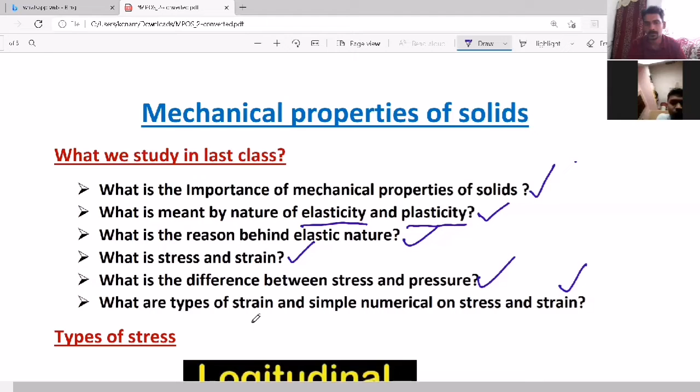After that, we took the introduction of the types of strain and simple numericals on stress and strain, like force by area, and based on the strain, what is the change in configuration. So these are the simple things we have studied, and 2-3 simple numericals we have solved. Now today, the very first thing we are going to study is types of stress. So till now, I have just given the brief idea, a reminder of what we have studied in the last class.

So now, today's first thing, as I said, types of stress. What is the first thing? Types of stress.

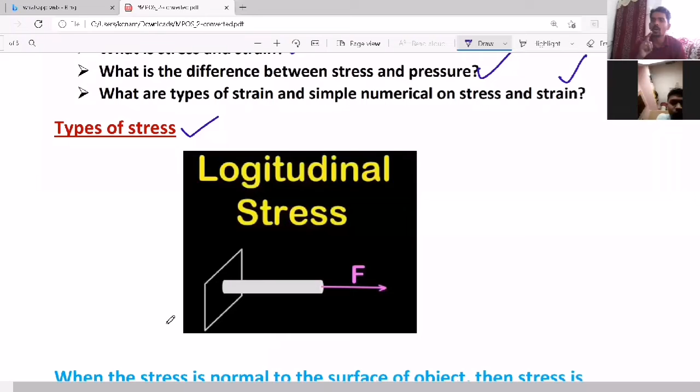So the types of stress, the very first thing is longitudinal stress. There are majorly 3 types of stress in our syllabus, and the first one is longitudinal stress. Here in the diagram you can see there is a rod, and you are applying force in this direction. The force is perpendicular to the area. This is the circular area of the rod, and you are applying force perpendicular to its surface.

So when there is a surface area, look at my hand, the direction is like this, perpendicular force direction. Then the stress developed, we call it longitudinal stress. But every stress is what? Stress is nothing but force by area only. Same formula for all types of stress. Even though we say 3 types of stress, in each case the stress is force by area only. But here longitudinal stress means the force which is acting perpendicular to the surface.

Just take one simple example: here there is a fixed support and one rod, or one thick rope, is attached. Now you apply force here. You try to hang from that, I mean you try to pull that. Then the force will act perpendicular to the circular area of the rope or rod. So that is F.

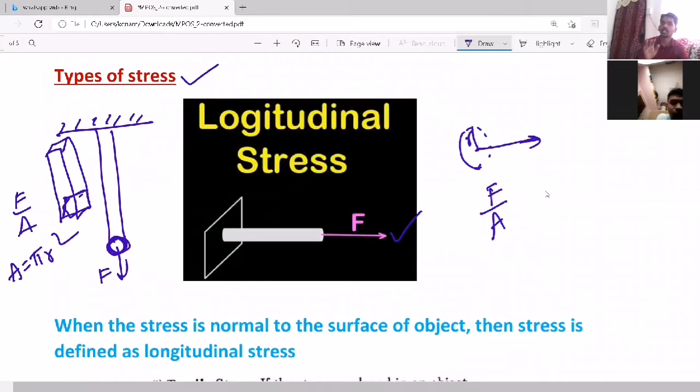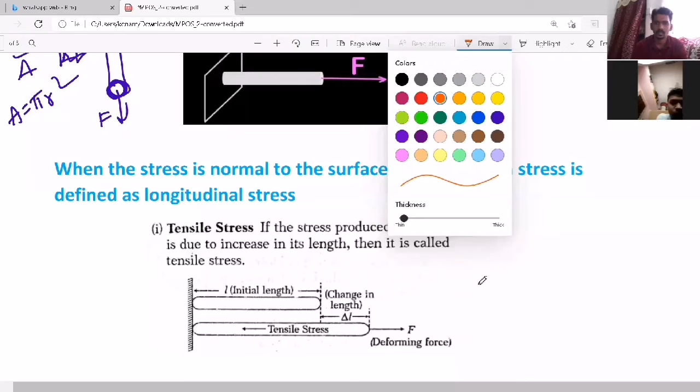But here again 2 cases come. I have written the definition also. So what is the definition? The definition is: when the stress is normal to the surface of the object, that means longitudinal stress.

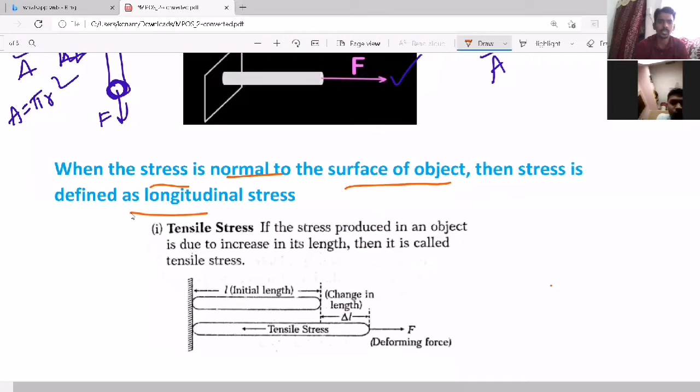But here 2 cases will come, I am telling: the first one is tensile stress, and the other one is compressive stress. What is the difference? Both are longitudinal stress only. But the difference is, let's take a wire hanging from a fixed support and you are pulling it with a force F. Then according to Newton's third law, you are pulling it with force F downward, so an equal and opposite force will develop in the opposite direction.

So for the wire, one force will pull it up, one force will pull it down. Then the wire will stretch, look at my hands, the wire is stretching. Then the length increases, it tries to increase. The stress developed is perpendicular to the surface area, and it is trying to increase the length of the object, and that's why it is called tensile stress. If the stress produced in the object is due to increase in its length, then it is called tensile stress. You applied some force, so there is a change in the length delta L. You are applying deforming force, so from initial length to final length there is an increase, and the corresponding stress is called tensile stress.

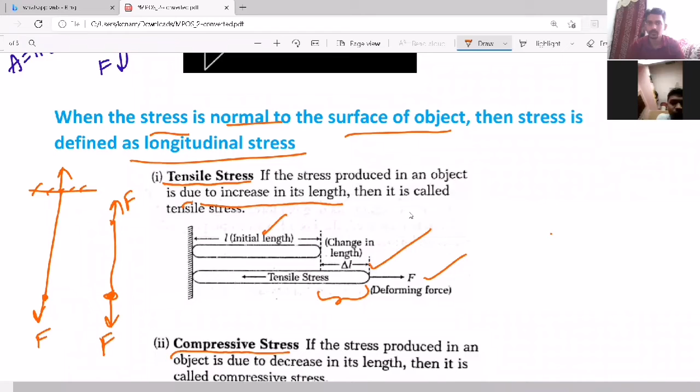That is the first sub part of longitudinal stress. Similarly, for compressive stress, look at my hand again: suppose this is the rod. Now you keep it on the surface, and from the top surface you try to press it. You don't try to pull it, you try to push it downwards, so you are trying to press the body. Then the length decreases, so the length is decreasing. That's why it is called compressive. You are trying to compress the body, that's why it is called compressive stress.

But here also you are trying to apply the force perpendicular to the surface. Surface is like this, and you are trying to apply force in this manner. Please try to observe my hands, so that the stress we define it as is again...

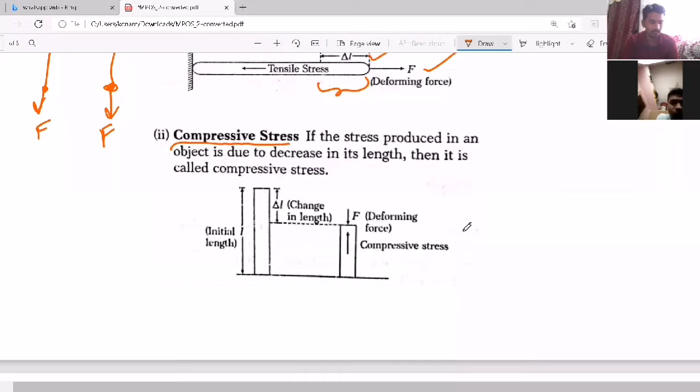...longitudinal stress only. But as there are two types of longitudinal stress, we call one of them compressive stress. So that is the difference between tensile stress and compressive stress. Now, after that, there is a longitudinal stress which may be tensile stress or compressive stress, but one common thing is...

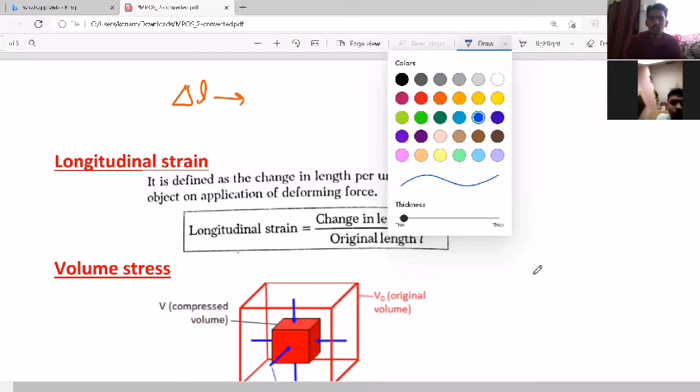what is changing here? Length. Length may increase, length may decrease. So there is a change in length always, delta L. Delta L may be plus or minus, but there is a change in length.

And there is an initial length also. So here what configuration has got changed? Length. Length of the object got changed. Because what we said, you apply deforming force, it develops stress, which causes strain. Nothing but what? The change in the configuration of the object. One of the dimensions will change. What dimension has changed in this case?

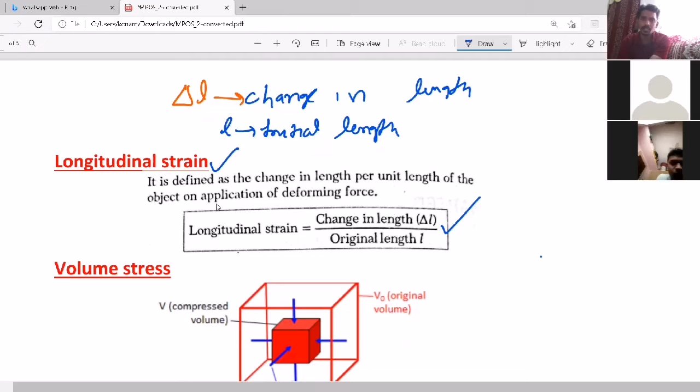Length. So that's why here the corresponding strain is called longitudinal strain. See here, longitudinal strain is the ratio of change in length by original length. That is the longitudinal strain. So there is a longitudinal stress, means there must be one corresponding longitudinal strain also.

Now the next thing. So after longitudinal stress, the next stress in our syllabus is volume stress. What is this? Volume stress. Now the name itself is saying you can also define it as hydraulic stress, also bulk stress in our syllabus. What we can call it as bulk stress or hydraulic stress. Also we can define it. Why we define it, we'll see first.

So here, if you look at the cubical shape, when you try to apply force from all directions equally, perpendicular to the surface, then what is happening? The volume is decreasing. But here the problem is, suppose you take a ball, you all know a smiley ball. So take the smiley ball and press it. Then shape changes. That is volume stress only. You are applying some force per unit area.

So that is called volume stress. Very good. But the change in shape is irregular. Once you press it randomly, the shape of the smiley ball is no more spherical. But we need the change to be such that the shape should not change, only configuration changes, dimension changes. Then only we can calculate. That's why we take a specific case. What is that specific case? You take a solid ball, spherical ball.

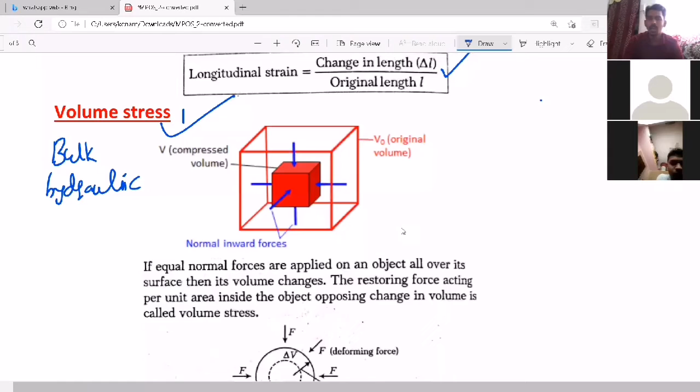You take a solid spherical ball and keep it inside the liquid, as shown in the diagram. You kept it inside the liquid, where liquid will apply pressure. So the pressure is nothing but force by area. So that only here we call it as stress, and that will act at every point on the surface perpendicular, as shown. So from all directions equal force, so there is equal change in volume.

So that's why in the diagram it is representing, see here, the inner dotted one is there, right? So that is the final volume, and the outer one is the initial volume. So there is a decrease in volume always. So in our syllabus, volume stress means it always causes a decrease in volume, not an increase in volume.

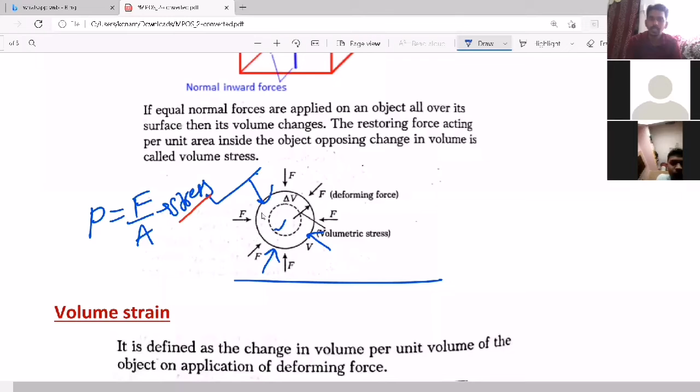Why am I specifying this? Because in the last topic, longitudinal stress means length may increase or length may decrease. But here also volume may increase, volume may decrease. But in our case, what is possible in practicality? Volume always decreases. So that's why here the corresponding strain is volume strain, that is delta V by V, or exactly written as minus delta V by V. That is the change in volume by initial volume, which is what we call volume strain.

So this way, the second one is all about: you apply some deforming force, that develops stress which causes a change in the volume, and that we call volume stress or bulk stress or hydraulic stress. Why do we call it hydraulic stress? Because it is related to liquids or fluids.

That's why we call it hydraulic. Hydraulic is the word related to fluids. That's why we also name it hydraulic stress. But the corresponding strain, you can simply take it as volume strain.

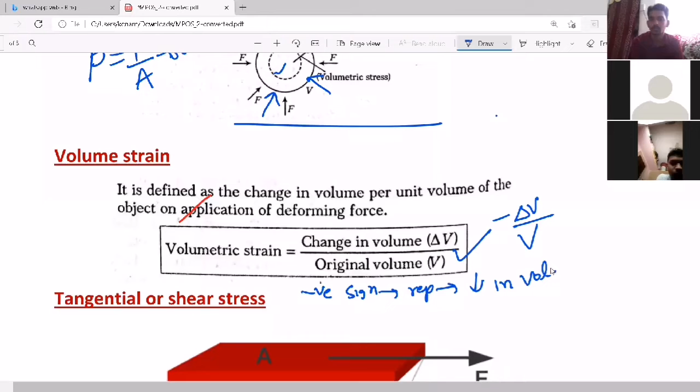Why are we taking minus here? The minus sign represents decrease in volume. That's important, just make a note of it. What does the negative sign represent? It represents decrease in volume. That's it. So now the third one.

Tangential or shear stress. What is that? So the first one, longitudinal stress, causes change in length. The second one, volume stress, causes change in volume. And this one, tangential or shear stress.

Shear or tangential stress means you have to apply force parallel to the surface, along the surface. Please look at my hands. The force should act parallel to the surface. So what happens is the bottom of the surface is fixed and you are applying force on the top surface, trying to push it.

Then there is a slight displacement. Now let us take it like this. This is the bottom, fixed. Now I am applying force parallel to it, so it is slightly displacing. It is not changing its shape, it is just slightly displacing. In that case, we call it tangential or shear stress.

See here, in the diagram it is clearly showing the top surface. This is the top surface, and on the top surface we are applying a force which is parallel to the surface. So again, force by area is called stress, but since it is acting parallel to the surface, we call it tangential stress.

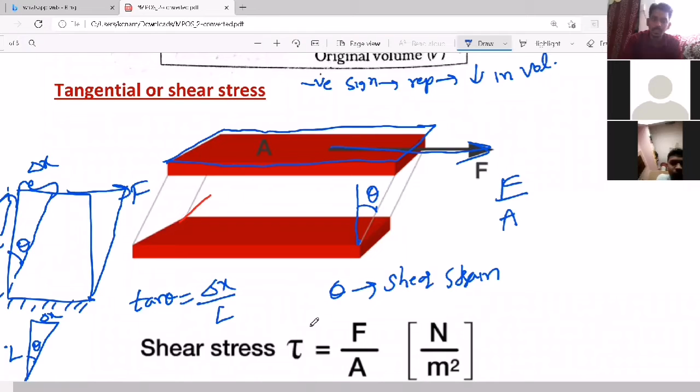That's why I said mathematics is very important for physics. One more mathematics point is important here: theta value is very small. When the object is fixed at the bottom and you apply tangential force, it slightly displaces by a very, very small angle. As the angle is very small, according to trigonometry, tan theta is approximately equal to theta, and that theta or tan theta equals delta x by L, we call it shear strain.

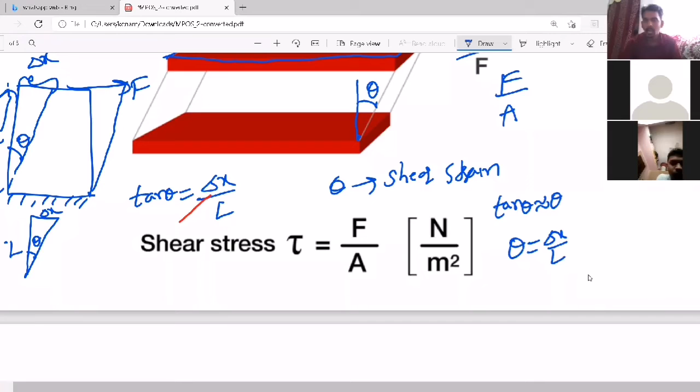So there are three kinds of stress we can develop on a particular body in three different situations, and there are three kinds of corresponding strain. So that is what I am showing again here with the diagram.

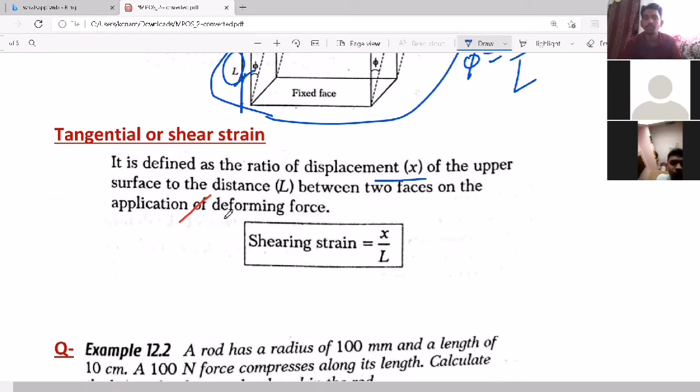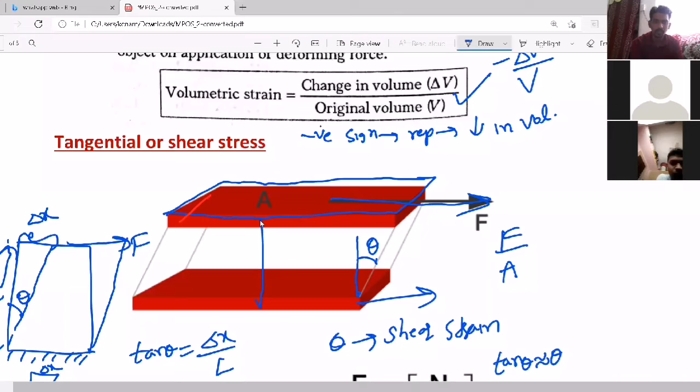Now the definition: it is defined as the ratio of displacement of the upper surface to the distance L between the two faces, on application of a deforming force. What does that mean? See here clearly, this is one surface, this is the other surface, and this is the distance between them, which is what we are representing as L. So it is x by L, or delta x by L.

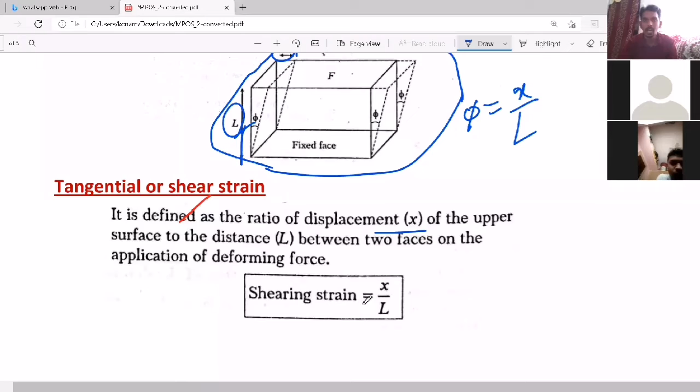So these are the three types of stress we can produce, and these are the three situations where we can calculate stress and the corresponding strain, which is exactly what is in our syllabus. Now let's take one or two simple questions based on it.

First question: a rod has radius 100 millimeter and length 10 centimeter, and a 100 Newton force compresses it along its length. Calculate the longitudinal stress developed in the rod. First understand the question and write the data.

What stress are they specifying here? Longitudinal stress. But the formula is force by area only. Here radius is given, so what will the area become? Pi r square, where F value is given as force 100 Newton, and pi is approximately 22 by 7 or 3.14, with radius mentioned as 100 millimeter.

100 millimeter is nothing but 100 into 10 power minus 3 meter. 100 can be written as 10 power 2, multiplied by 10 power minus 3. Using the formula x power m into x power n equals x power m plus n, 2 minus 3 gives 10 power minus 1. This way you can find the radius value in terms of meter.

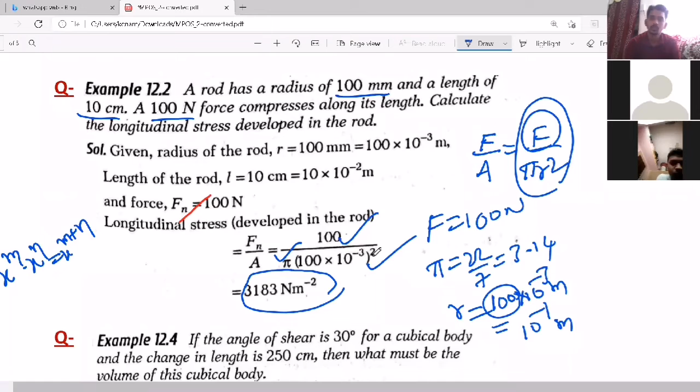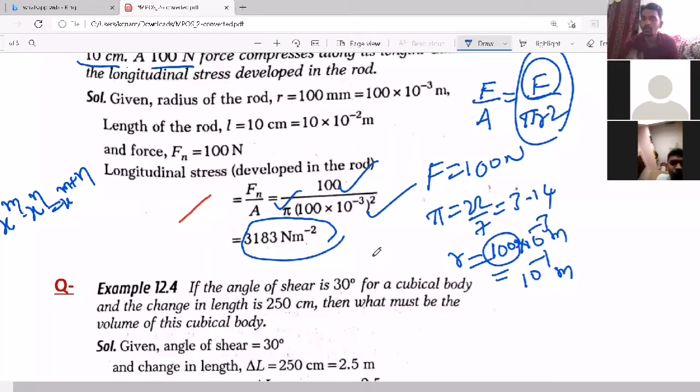While doing calculation, you must be precise, take some approximations, and calculate very quickly. Only then can you save time from the entrance exam point of view. So please try to understand the question, collect the data, convert units, substitute in the formula, and do the proper calculation. 60% of questions in NEET or any entrance exam are based on these formulas and data, where you need to understand the question, immediately realize what topic or chapter it is, take the corresponding formula, then take the data, do the required conversion, substitute, and calculate properly.

Now one more question: if the angle of shear is 30 degrees for a cubical body and the change in length is 250 centimeter, then what must be the volume of this cubical body? Given: angle of shear is 30 degrees.

But one more thing I didn't specify earlier: when you take shear stress or shear strain, we take tan theta approximately as theta, because theta is very small in practicality. But in this question, they have given angle as 30 degrees, so you don't take it as theta, because theta is not small here. When theta is 1 degree, 2 degree, very small value, then tan theta is approximately theta. But when theta is not small, then you take tan theta as it is. The formula remains the same.

Tan theta equals delta x by L. If the angle of shear is given and the change in length is 250 centimeter, then what must be the volume? Consider the body like this: take the side length as L, and it got shifted by distance delta x, which is given as 250 centimeter.

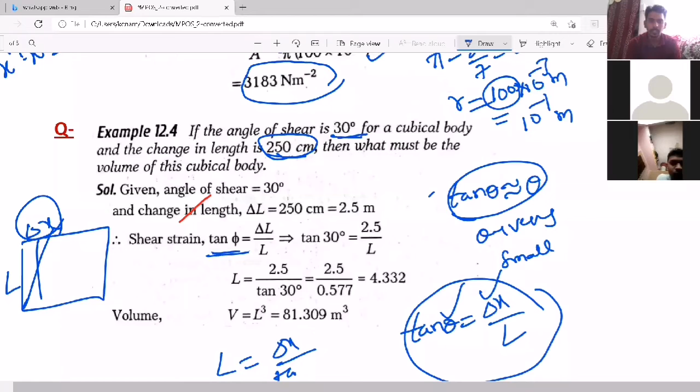Then tan theta equals delta x by L: theta is given, delta x is given, so you can find L. Take L to the left side: L equals delta x by tan theta. Using trigonometric ratios, tan 30 is 1 by root 3. Substitute and you will get the L value. And you know that the volume of a cube is L cube, so once you find L, take volume equal to L cube.

Just try to substitute. While doing the calculation, this is like a descriptive question, but in the NEET entrance it will come with options. Here L value is 4.3. Now 4 cube means 64, 5 cube means 125. If the values are very close, then you don't take approximation; if the options are far apart, with a huge difference, then you can take approximation. Then try to calculate, and it will become easy and quick for you.

Calculation plays a vital role from the entrance exam point of view. So till now we studied the three types of stress, their formulas, and the corresponding strain - longitudinal stress and strain, volume stress and strain, and shear stress and shear strain. So the final conclusion is: you apply deforming force, there is a stress, and there is a corresponding strain. Force develops stress, and stress causes strain.

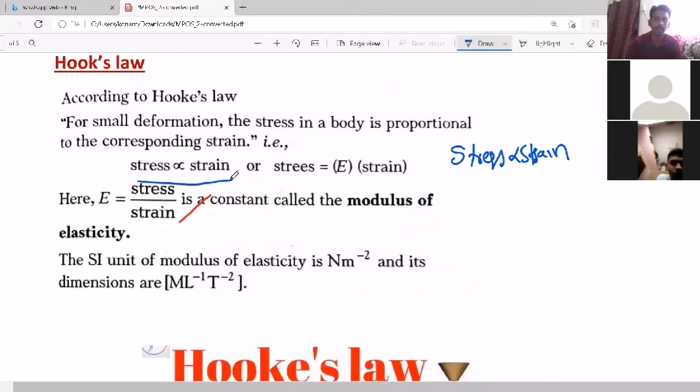Under such elastic limit, what he said is stress is directly proportional to strain. What is the relation he said? Stress is directly proportional to strain. So that is what we represented here.

But wherever proportionality is there, to remove the proportionality we substitute one constant. So here also the proportionality constant will come, which we represent with capital E, called modulus of elasticity. Modulus of elasticity means a factor on which the stress and strain depends, or which depends on the nature of the substance.

So E is called elasticity, elastic coefficient, or modulus of elasticity. If you take the formula and bring strain to this side, it becomes E equal to stress by strain, where stress means force by area, so Newton per meter square. But strain is dimensionless. That's why the dimension or unit of E is the same as stress - the units of E are same as stress, because strain has no dimensions or units.

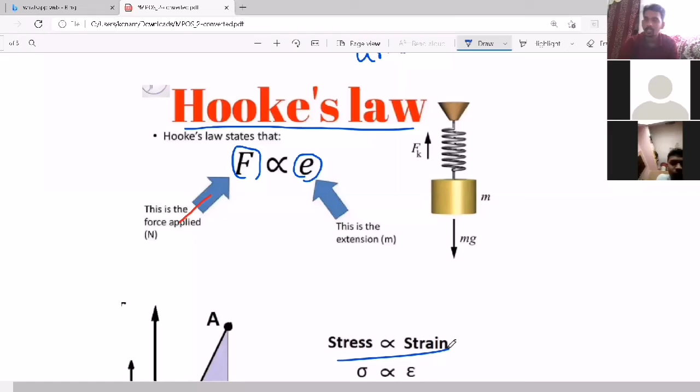So here, Hooke's law says when you apply force, there is an extension in the spring just like this, so force is proportional to extension. Same way here, stress is proportional to strain - that is Hooke's law. So force or stress is always directly proportional to the strain, or change in configuration. That is Hooke's law.

So here, if you take a graph between stress and strain, with stress on the y-axis and strain on the x-axis, that means it's in y proportional to x form. If y is proportional to x, that becomes y equal to mx form, where m is the slope of the graph. If the graph makes some angle theta with the x-axis, then tan theta is called the slope of the graph. So for any graph, slope of the graph - how to find it.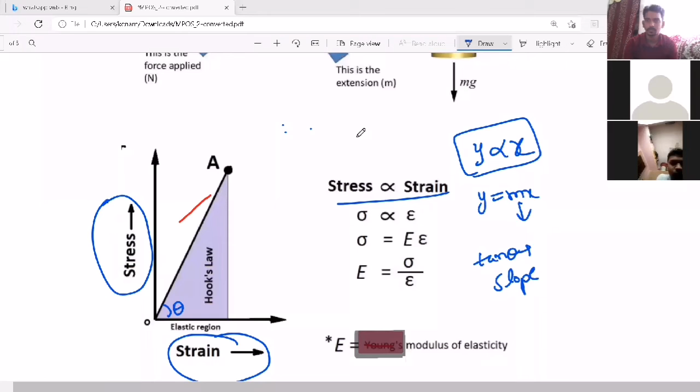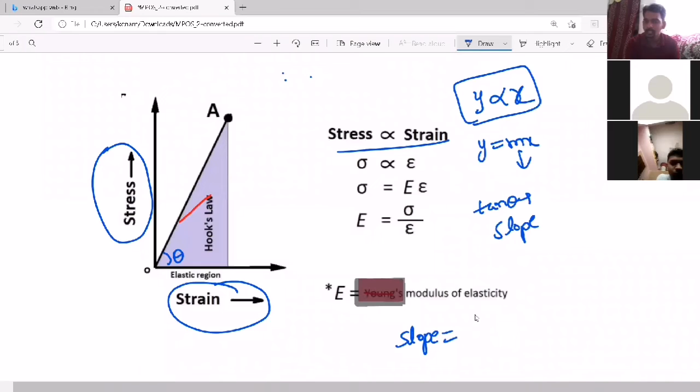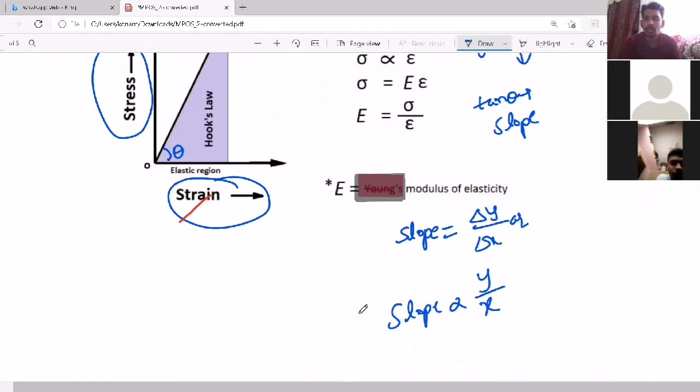For any graph, slope means tan theta, where theta is the angle made by the graph with the x-axis. Another important formula: slope means delta y by delta x, or slope of a graph is directly proportional to y quantity by x quantity in physics. So slope of any graph, in physics or anywhere, is equal to y quantity by x quantity.

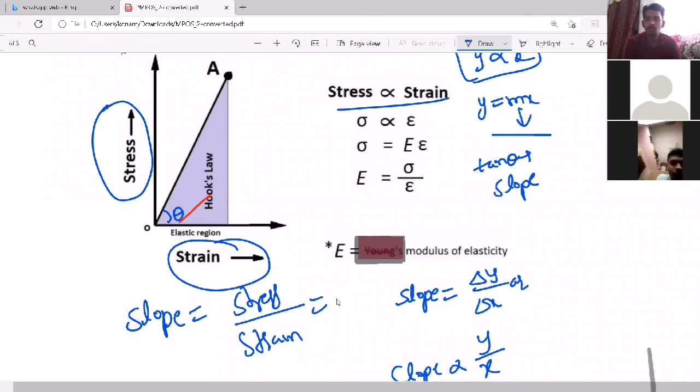So when there is a graph between stress and strain, it is a straight line passing through origin because it is in the y equal to mx form. The slope of the stress-strain graph is proportional to stress by strain, which is nothing but modulus of elasticity. If they ask what is the graph between stress and strain, it is a straight line passing through origin. If they give a stress versus strain graph, the slope becomes y quantity by x quantity, or tan theta, where theta is the angle made by the graph with the x-axis.

So the conclusion is: slope of stress versus strain graph is equal to modulus of elasticity, and that always remains constant because it is a straight line. A straight line graph means slope is constant everywhere, same slope at every point. See here, in the figure, at this point the angle is theta, and at this point also the angle is theta. So at every point, the slope remains the same for a straight line.

So the final conclusion is slope of stress versus strain graph is proportional to stress by strain, that is proportional to modulus of elasticity. So more slope means more elasticity.

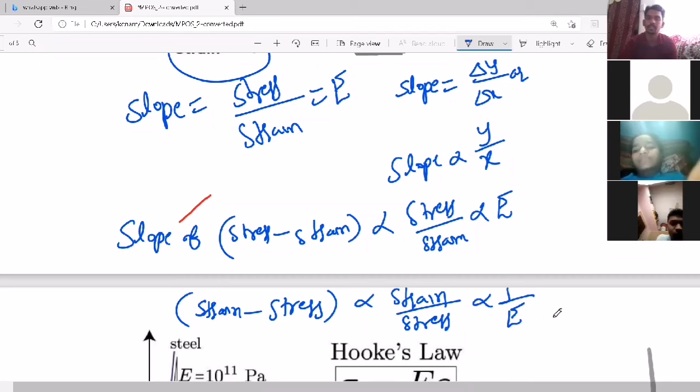Sometimes they may give the graph between strain versus stress just to confuse. Suppose they have given strain on y-axis and stress on x-axis, then it will become strain by stress, that means it will become proportional to 1 by E. That difference also you should be able to find.

Now let's see, there are four different materials: steel, plastic, rubber, and some biological tissues. If you compare whose slope is more, the steel slope is more compared to plastic, compared to rubber. That means slope is more means more stress it can bear, that's why it is more elastic body.

When you compare two substances, whoever has more slope is more elastic, that means it can bear more stress and cannot break that easily. That is what you can understand from the graph.

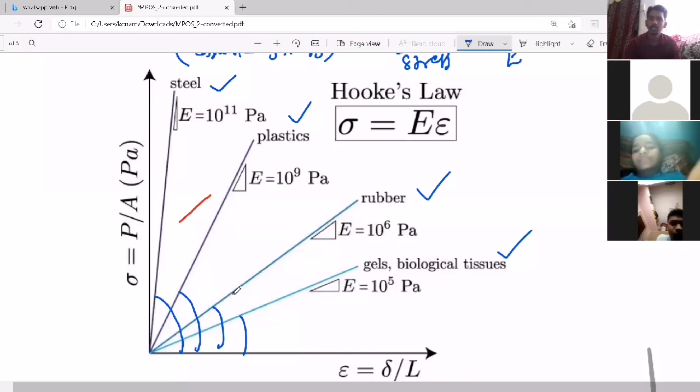So here also the graph is between stress versus strain. You can represent stress with the symbol sigma and strain with the symbol epsilon. This is epsilon, this is sigma, the symbols for stress and strain.

So here I have given a general comparison between a few materials. You might be thinking rubber is more elastic since it easily stretches, but that doesn't mean it is more elastic. It cannot bear maximum force; if you apply just a little force, it will break. But steel, you can stretch it longer, that's why it is called able to bear more stress for a small change in strain, and that's why it is called more elastic.

Modulus of elasticity depends on the type of material. Steel is one type of material, iron is another, brass is another, rubber is another. It does not depend upon the value of stress and strain. As stress increases, strain increases, but the ratio of stress by strain, that is modulus of elasticity of a material, remains constant. That is what the Hooke's law says.

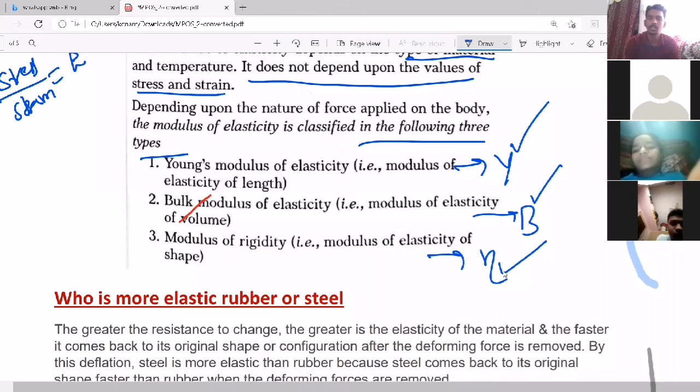As we have seen, there are three types of stress and three types of strain. First, longitudinal stress by longitudinal strain gives Young's modulus. Volume stress by volume strain gives bulk modulus. And shear stress by shear strain is called rigidity modulus. These three things we will study in detail in the coming class.

Now, who is more elastic, rubber or steel? See here, the greater the resistance to change, the greater is the elasticity of the material, and the faster it comes back to its original shape or configuration after the deforming force is removed.

See, take a rubber eraser, whatever you use daily, and try to bend it. It will bend easily, but it will come back slowly. So such kind of material is called less elastic. Easy stretchable doesn't mean it is more elastic.

But when you consider steel, it is very hard to stretch, and it will come back to its original position quickly. That's why it is more elastic. It has greater resistance to change. It should oppose the change, and greater elasticity, then it is called so.

So who is more elastic? Steel is more elastic than rubber, because steel comes back to its original shape faster than rubber when the deforming forces are removed. Steel can resist greater force and it can come back quickly. That's why it is called more elastic, under the elastic limit. We are talking only about under the elastic limit.

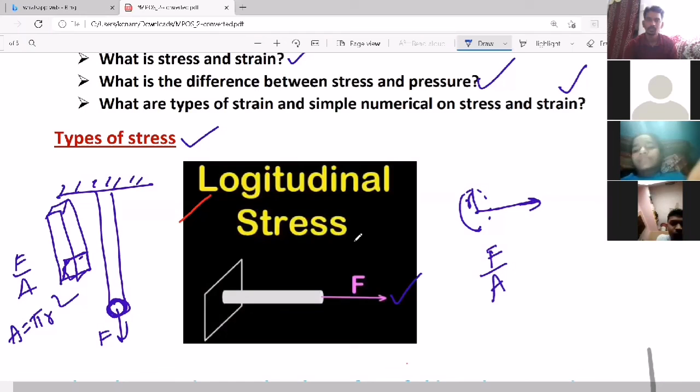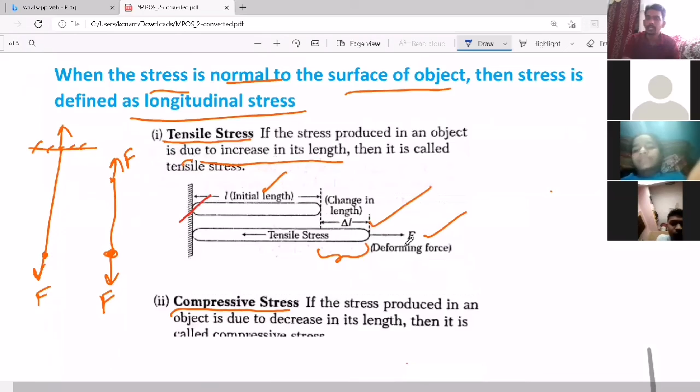Now let's have a look at what we have studied till now. First, types of stress: longitudinal stress, where force acts perpendicular to the surface area, which is again two types - tensile stress when length increases, compressive stress when length decreases, and the corresponding strain is longitudinal strain, that is delta L by L.

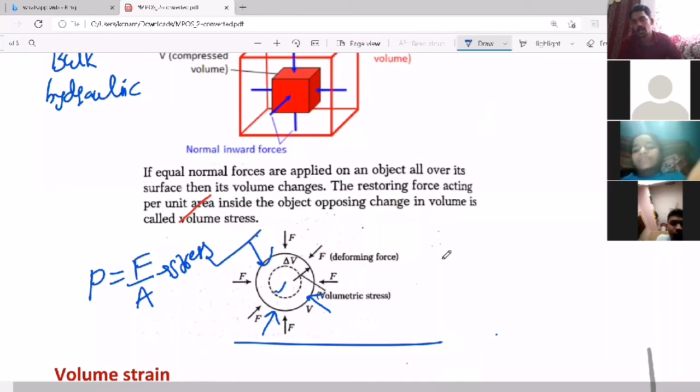The second one is volume stress, where volume changes, but in our syllabus volume decreases. So that is also called hydraulic stress or bulk stress, and the corresponding strain is bulk strain or volume strain. Here the negative sign represents there is a decrease in volume of the body.

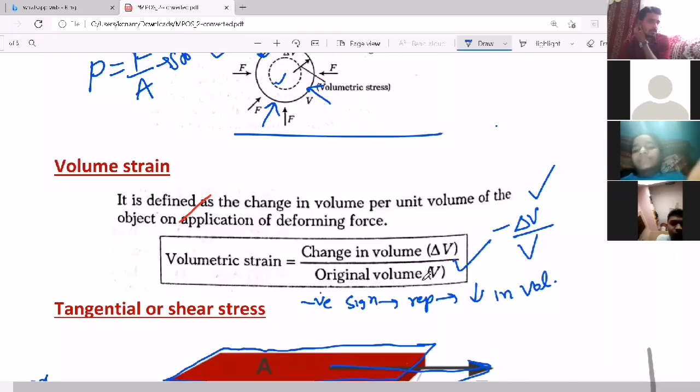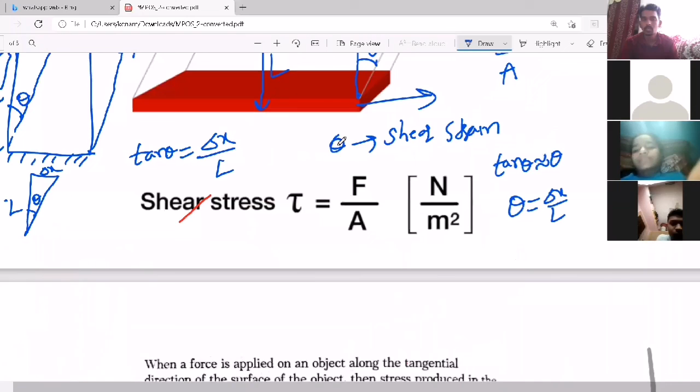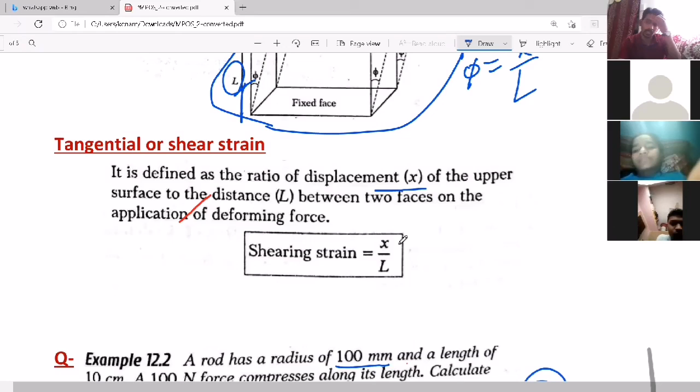Third, tangential or shear stress, where force is applied parallel to the surface so that there is a shift in the position, and that shift, that angle, is called shear strain. In this case we consider the angle to be very small, so tan theta is approximately equal to theta. We have seen two simple questions based on stress and strain.

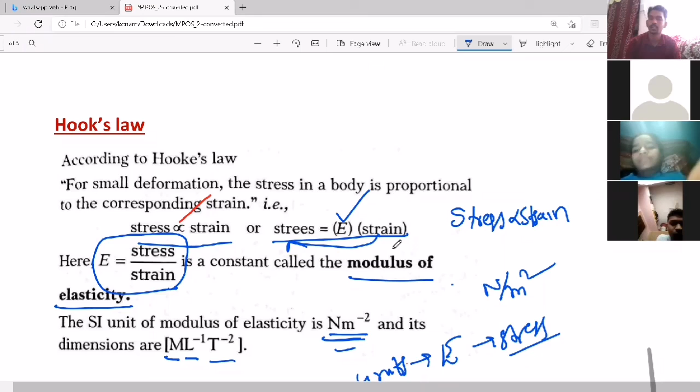The next thing we studied is Hooke's law, which says that stress is directly proportional to strain. When you increase the deforming force, stress increases and strain also changes, but the ratio stress by strain remains constant, and that ratio is called modulus of elasticity, whose unit is same as stress, Newton per meter square.

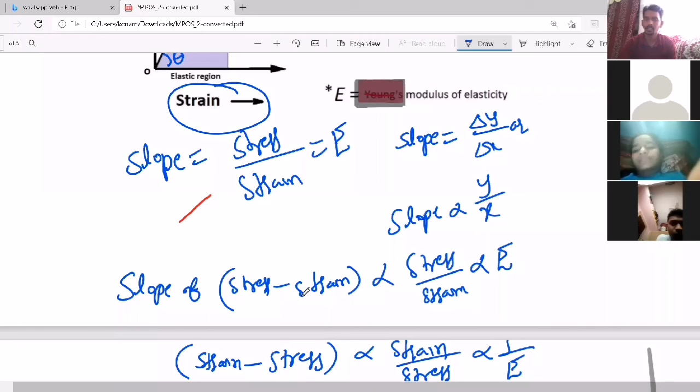That is stress by strain. If you draw the graph between stress and strain under the elastic limit, stress is proportional to strain, so you get a straight line passing through origin. The slope of the graph is tan theta, where theta is the angle made by the graph with the x-axis, or the slope equals stress by strain if stress is on y-axis, or strain by stress if strain is on y-axis and stress is on x-axis.

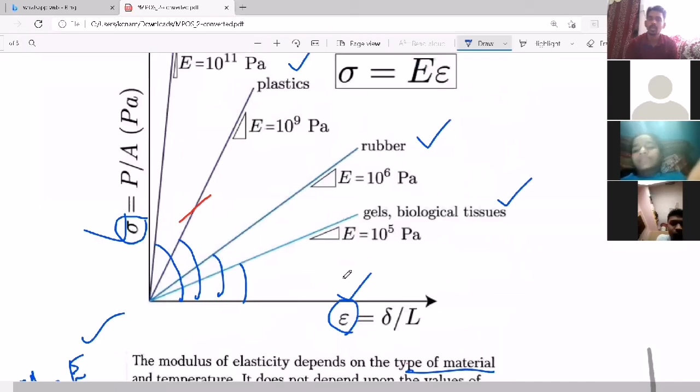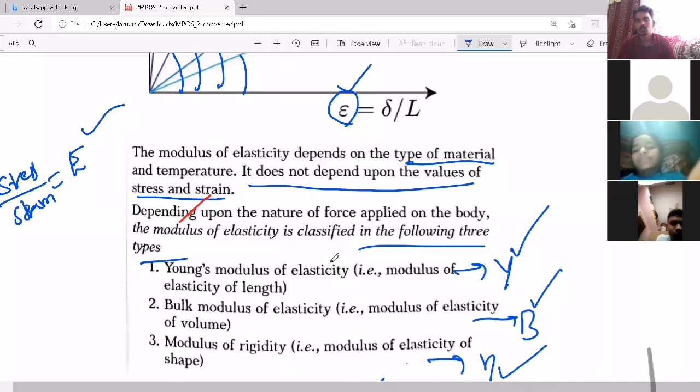Comparatively, more slope means more elasticity, a more elastic body. When you compare different materials, steel is more elastic, and the modulus of elasticity mainly depends on the nature of the material - other factors will also be there, which we will study in the coming class, along with the types of modulus of elasticity.

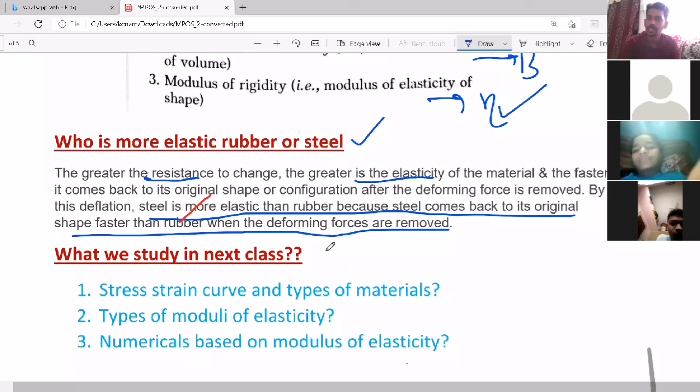So finally we concluded that steel is more elastic than rubber because it is more resistive and can come back to its original shape quickly. That's the conclusion. In the next class we will study the stress-strain curve for any solid body, the types of materials, and the types of modulus of elasticity - Young's modulus, bulk modulus, and rigidity modulus - along with the effect of different factors on them, and a few numericals based on those things.